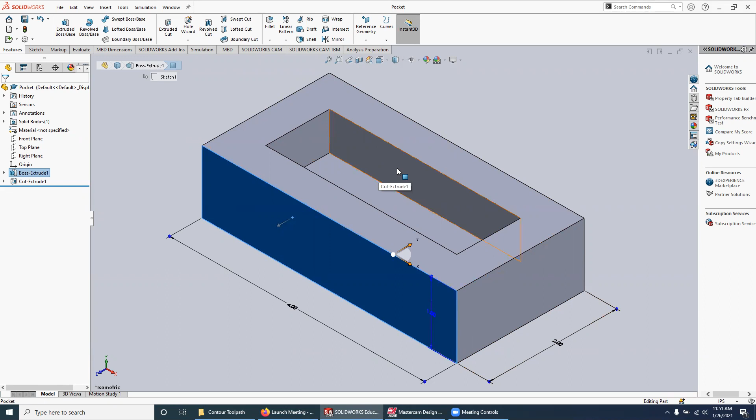So I'm going to stick with our very simple parts here, using our stock material that is 4 inches across, 2 inches in this direction, and 1 inch thick, and just add a pocket to it, a very simple pocket that we'll do in Mastercam, where this pocket is 3 inch dimension in this direction, 1 inch dimension in this direction, and is 0.6 inches deep. So again, just a very simple part to get the mechanics down of actually doing pockets in Mastercam.

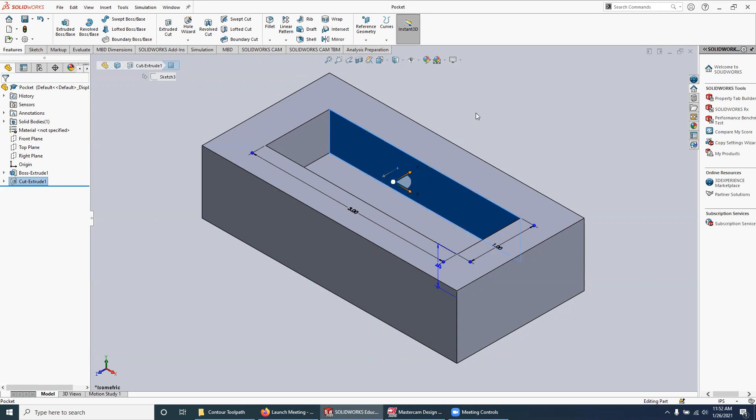And you'll also notice, if you happen to be watching this and you're not one of my current or former students who are looking at this for current instruction for class or as a refresher, that I've got some sharp corners in here. And what I'll do is talk about that at the end of this video, but also do additional videos where we make some changes and talk about the radiuses that are left behind by tooling. So just want to call your attention to that again in case you're watching this and you don't happen to be one of my current or former students.

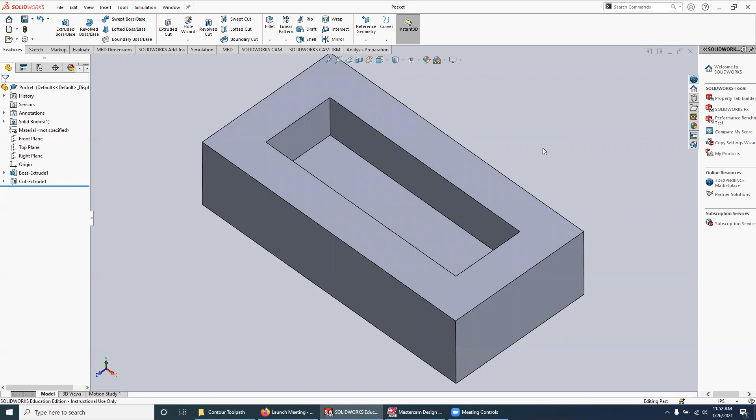So let me go over to Mastercam here. And so what I'm going to do is instead of taking the SolidWorks model that I have and bringing that into Mastercam, I'm just going to go ahead and redraw this as just a two-dimensional drawing in Mastercam, and then go ahead and do the tool paths from it.

So once again, with trying to do something that's fairly simple here, I still want to be able to show how to draw things in Mastercam, even though if you get into more complex parts, particularly for my students, it may not be the thing that they would want to do. They may want to use SolidWorks, but I'll address bringing in a SolidWorks part and working with that in an upcoming video. So at any rate, I'm going to go ahead and first draw the rectangle that defines the outside of my stock part.

So it's really with what I'm doing in class here. The other thing that I've mentioned to my students is that for the purposes of this class and what we're machining with these small plastic blocks, we are making our stock piece and our finished part the same exact dimensions. Although that's not necessarily how it would always happen in industry, or even for them when they get to their senior projects, for these introductory videos that's sort of what I'm sticking to. And once again, there will be another video coming up where I will give some strategies for using stock material that's bigger than the finished part.

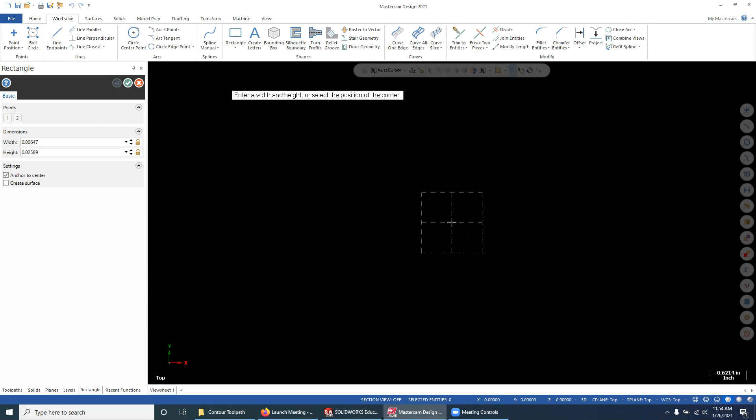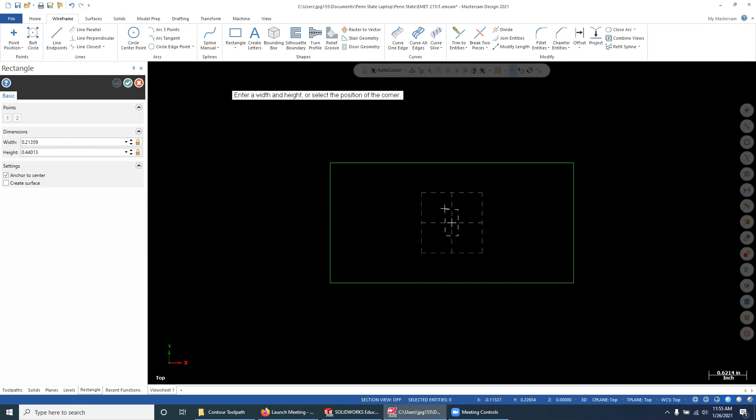So I'm going to go ahead and anchor this to the center for this rectangle. And when it tells me to select a base point, I'm going to select the origin here. So I'm going to make this outside rectangle be my 4-inch by 2-inch rectangle. Instead of completely getting out of this particular command, I'm going to make use of this OK and create new operation over here in the rectangle dialog box, and make myself a new rectangle inside that will represent the pocket. So this happens to be 3 inches wide and 1 inch in height. And I'll just go ahead and select OK.

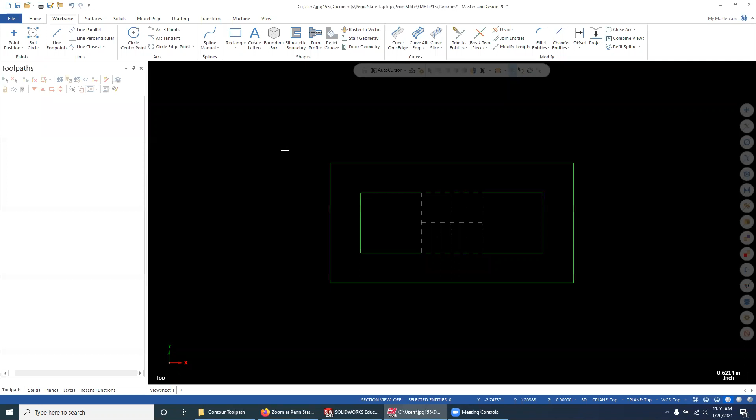And so now I have the geometry that I've created, which is the representation of the outside of the pocket, or essentially what we use as the contour for the pocket, as well as the outside of the part here. So at this point, even though the geometry is quite simple, I'm going to go ahead and save this part. So I'm going to do a file, save as, and go right to where it is that I'm saving. And in this case, I'm just going to save this as pocket 1 and hit save.

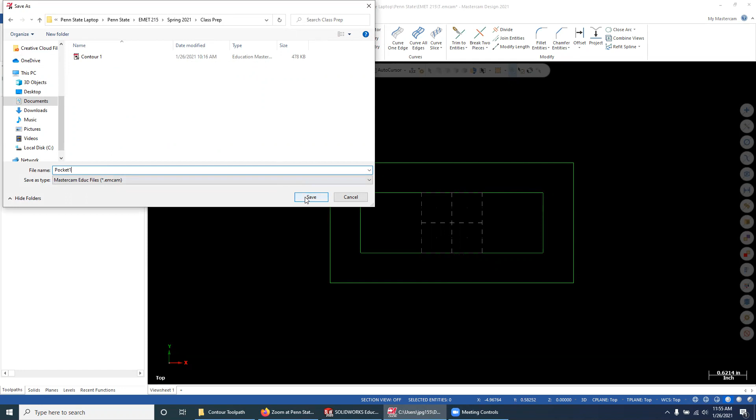So another thing that I want to mention about these videos is in the first sets of videos, especially with the contour, I made these in a lot shorter sessions, but that was so that I could break it apart into more discrete tasks within Mastercam. At this point, though, I'll go through a lot of the same tasks in terms of doing the machine setup, the stock setup, but I'll try to stick to doing it all in one video for the most part, and maybe break it out a little bit if I think it's getting to be a little bit too long. But that's sort of my intention right now.

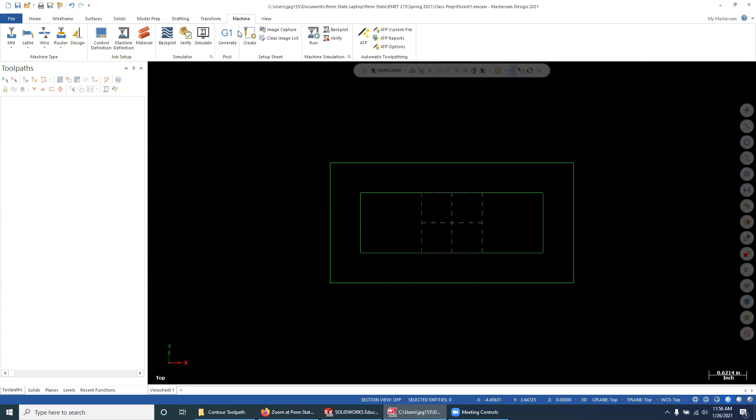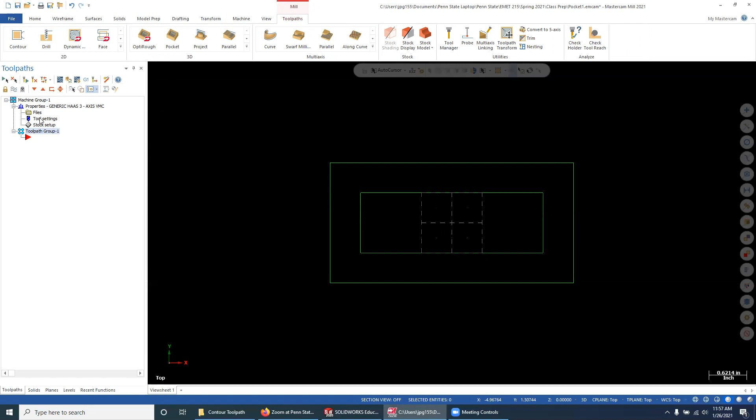So the next thing that I want to do now is I want to come in and add my machine group. So I'm going to choose my machine. From this machine tab, I'm going to come all the way over here to the left, and the mill that I'm going to choose is this one that I had already added in previous videos, which is this generic Haas 3X mill. I'm going to select it, and you'll see that over here in my toolpath manager, of course, the machine group pops up. I'm going to also open up the properties here for this generic Haas 3X 3-axis VMC, and I'm going to make some changes to my tool settings and my stock setup that are going to be very familiar to you from the previous videos that I had done with the contour.

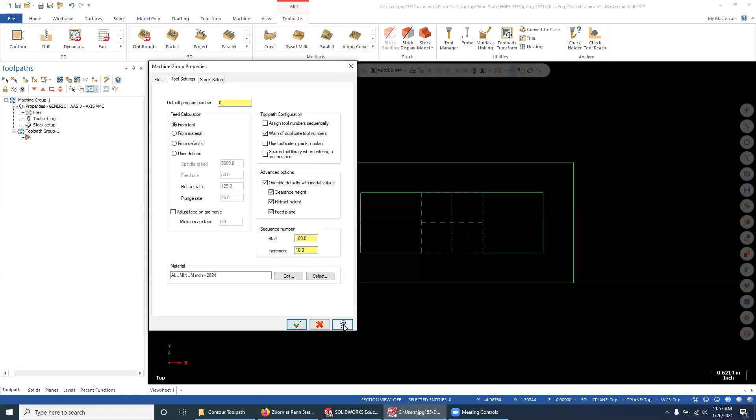So in this case, I'm going to warn of duplicate tool numbers, and I'm going to override these defaults with modal values, and just go ahead and enable each of these. Once again, as I had mentioned in one of the last videos, if you ever have a question about what these settings are doing, you can always open up the in context help. It will launch in a separate web browser, and then you can usually select on parameters. And when the parameters opens up, you can see an explanation of what these different settings are.

So in my stock setup, I'm also going to enable this display, and I want to have the wireframe display because that happens to be what I prefer. I'm also going to go ahead and put my dimensions in. There's an easy way to do this. What I'm going to do here is select all entities, and you can see I then wind up with my 2 inches in my Y direction and my 4 inches in my X direction. And my stock part, again, is the representation of the chunk of material that I'm going to be cutting. So what I'm going to enter in here is my 1 inch.

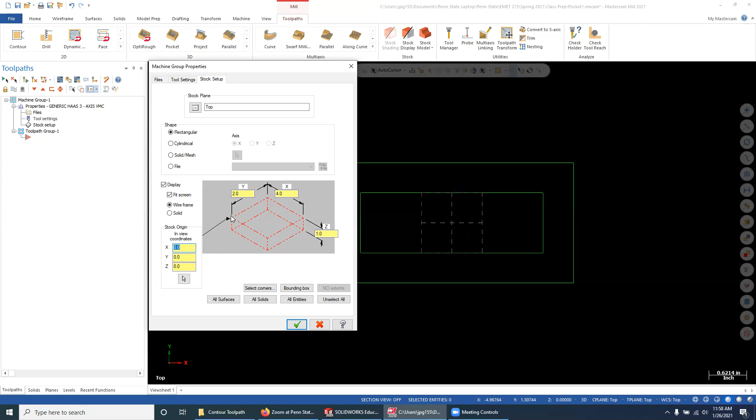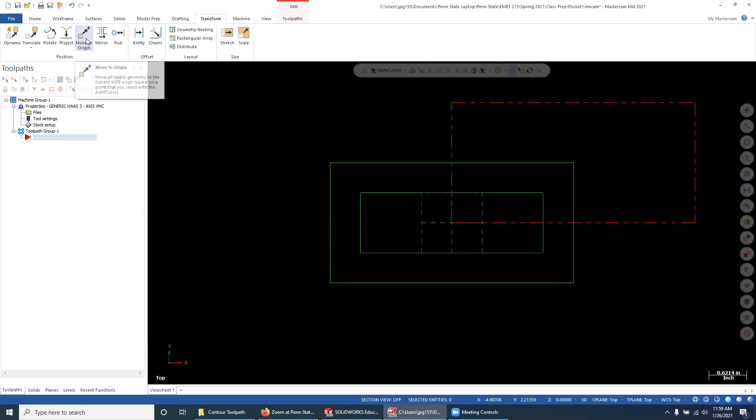The last thing that I'm going to do in here is simply left click over here in this corner so that I can move where my stock origin is at. And once I'm back out onto the screen here, I will also move the origin for my geometry as well. So let me just go ahead and select OK and do that. Because right now my origin for my geometry is in the center here, these two don't match up the way that I would like them to. So I'm going to go into the transform tab, and I'm going to use this move to origin. It tells me to select the point to translate from. So I'm going to select this lower left-hand corner, and it just moves everything over.

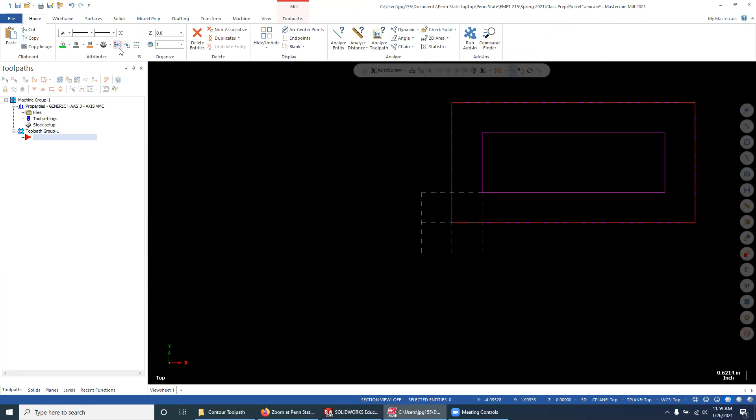Just to review, if you want to clear these colors back to the original geometry colors, you can go to the Home tab, and in this Attributes group, there is this button called Clear Colors, and it will bring everything back. If you want to view things on the screen a little bit better and get everything to fit in the window, in the View tab, I can go over here to where it says Fit, and it will zoom and fit to the entire window. If you don't really care for that, you can always use your mouse wheel to zoom in and out. And you can also hold down the Shift key and the center mouse wheel, and you can sort of pan around.

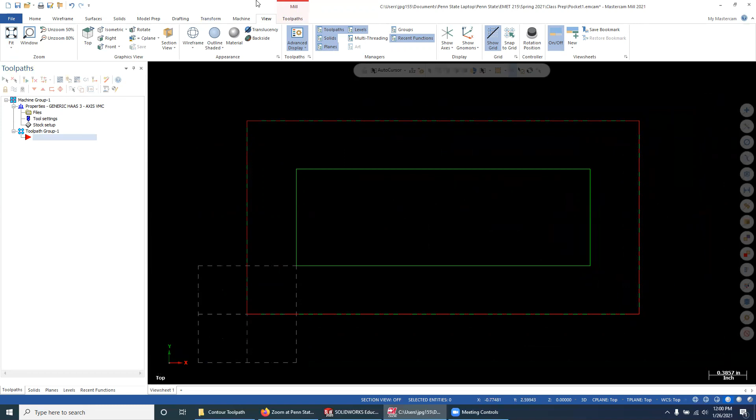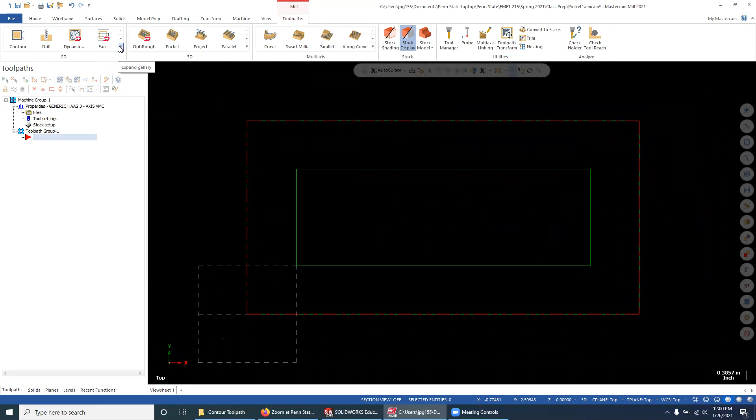So now that I have my machine group in here, I'm actually going to go in and add my toolpath. I'm going to add in my pocket toolpath. Just to again review here, I'm not using these 3D toolpaths. I'm still using these 2D toolpaths over here. In order to find that pocket, I need to expand this gallery simply by left clicking on these arrows here. That opens things up, and I can see that I've got a 2D pocket that I can choose. So I'm going to go ahead and do that. The first thing that opens up here is my chaining dialog box. In the contour videos, what I ended up using was this single chaining method.

What I'm going to use here, though, is this default chaining method, because what I want to do is select this entire area to chain, so this entire inside area. So if I simply left click on this now, you'll see the entire rectangle is highlighted. You'll also see that this is the direction that the tooling will take around this as well. But what we're going to end up doing is setting up a zigzag toolpath.

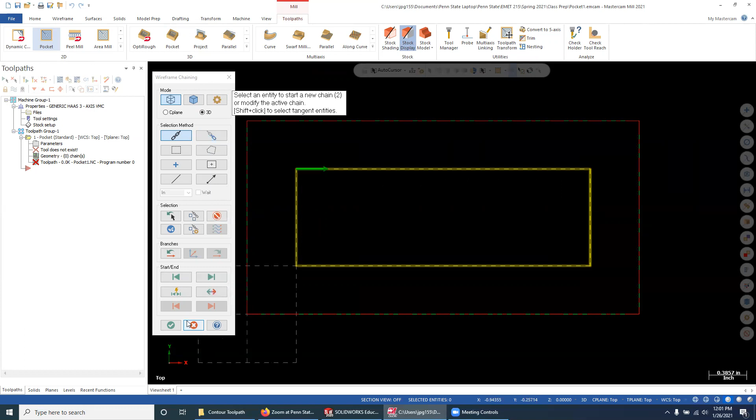So at any rate, let me go ahead and select OK here. And it launches me into this 2D toolpaths for pocket dialog box. So very similar looking to the contour that we did. And so the first thing that we're going to do here is select our tool. We're going to select the same tool, that 1/2 inch flat end mill.

So a lot of this is also going to be very similar to what we did in terms of going through the filter, selecting the library tool, and then changing our feeds and speeds. Let me go ahead and just review how to use this filter. Right now, the only tool that I have selected is this flat end mill. If you happen to open this up and all of these tools are selected, you can left click on none and it will take all of these away.

And what you can then do is just go back and select the thing that you want, which in this case for me is this flat end mill. And I want to find the Mastercam library tool that is equal to a 1/2 inch in tool diameter. So I'm set here. And by the way, this has a drop down here. In this drop down, I've just set this to equal, and then manually entered in my 0.5 inches. I'm not going to change any of these other settings right now. I'm just going to go ahead and select OK.

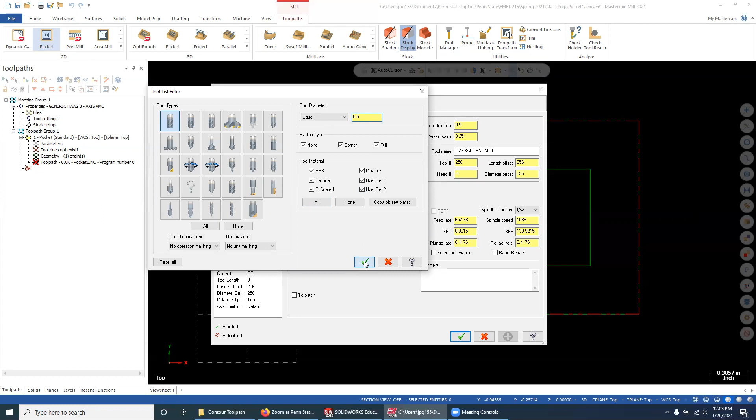But you'll see that, again, by using this filter, it does not change any of the tool name or anything here. I actually have to go into this tool library and select my 1/2 inch flat end mill. So I'm going to go ahead and select it. And you're going to see also that now I have this tool number in here for the tool number, the length offset, and the diameter offset.

Because I don't have this same tool number loaded on the milling machine that's in our lab, I'm going to change this to the number that I do, which is tool number 6. So that's the tool number associated with that tool. That's the position that it's always in on the mill. If you'll notice, that also changes the length offset and the diameter offset.

And we want that to happen because all of these settings in here will eventually trigger different G codes to be set whenever we go to post-process. And we really need the tool number, length offset, and diameter offset all to agree, so that when we run this on the machine, we don't have any bad things happening. And I'll talk about length offset and diameter offset in class a little bit more.

So the other thing that I want to do here is change this feed rate. We're going to use the same feed rate that we used before for the contour, which is 20 inches per minute. And we're going to use a spindle speed of 2,500 RPM, so revolutions per minute. So again, the feed rate is in inches per minute. The spindle speed is in RPM.

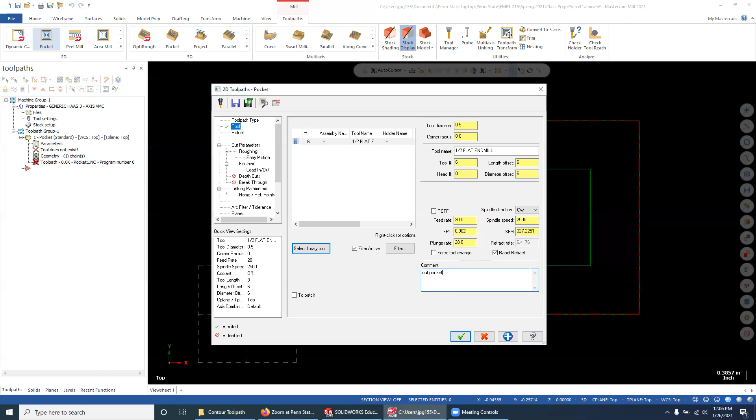I'm going to also add a comment in here, just a simple comment that this cuts a pocket. And again, these comments will also be output into the G code as well. I'm going to go down here to my cut parameters, and in this, I'm going to leave the machining direction at climb, and we'll discuss climb versus conventional milling in class as well.

The other thing that I'm going to do down here is I'm going to set the stock to leave on walls and the stock to leave on floors at 0. So in other words, I'm going to take everything off in this pocket. So if you desire to leave stock on the walls or the floors for additional finishing passes or something like that, this is a way to do that. But for the purposes of this class, we're going to go ahead and take this all the way down to 0, which means we're not going to leave any of the material on in terms of the depth or along the side walls of the pocket.

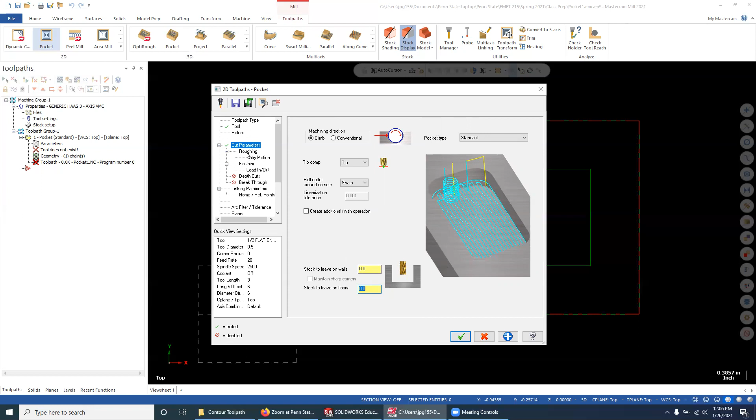So I'm going to step down to roughing now. In this one, the only thing I'm going to change is I'm going to change to a zigzag cutting method. So what this is going to do is drive the cutter back and forth. So instead of using a high speed or some of the other cutting techniques here, I'm going to use a simple zigzag, and I'm going to leave all of these other things, including the step over percentage and distance, set to their current defaults.

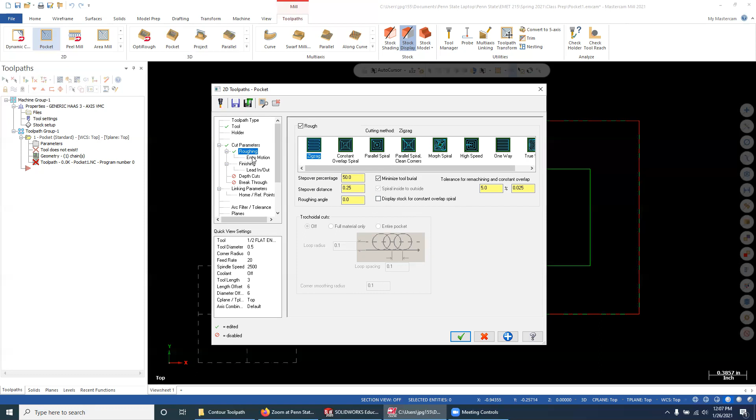For the entry motion, when I move down to the entry motion, what I want to do here is make sure that my helix entry motion is enabled. You can turn this off and just plunge right into the material, or you can use a ramp where it just kind of ramps into the material. But I do like the helix.

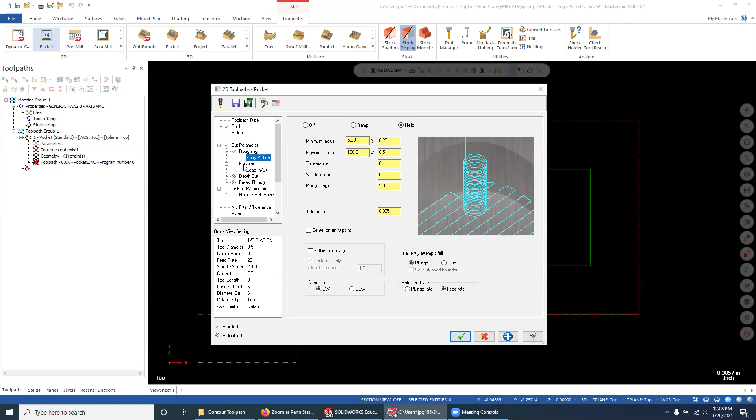The helix is nice for plunging into the material in the middle, sort of to start the cutting in the pocket, because what it really does is it takes advantage of the end mill's side cutting capability. The end mills are really designed for side cutting, not for just plunging into material. Now in our labs, we use predominantly center cutting end mills, and so they can plunge directly into the material, but this does make for a more efficient cut, which is why I like to use it. And I'll go ahead and just keep all of the rest of these defaults set the way they are for now.

So for our finishing cuts, I'm just going to do one finishing pass here. And what I like to do in here is enable keeping the tool down. And I also like to make sure that machine finish passes only at final depth and machine finish passes after roughing all pockets are enabled, specifically for this class.

So these are a couple of things that will actually end up cutting down on the amount of time that we spend machining. Although you're going to see that, for this particular part, the actual machining time does not take that long. In fact, for most of the parts that we do in class, the machining time is not what takes up the most time. It's actually the setup of the machine in terms of homing the part and things like that, especially when you're new at trying to find all the buttons and stuff like that.

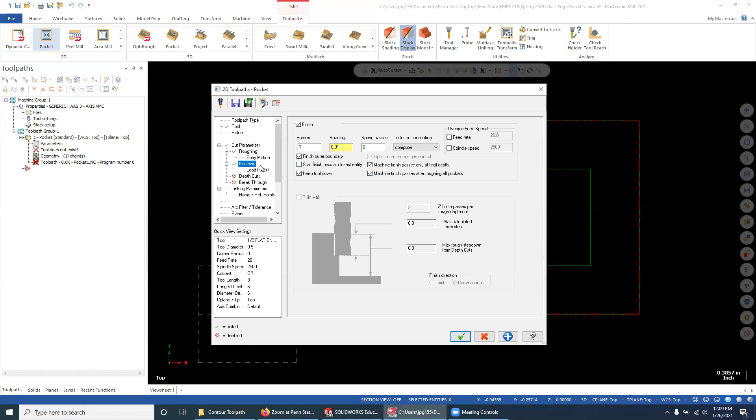So the next item down on the list here is the lead in, lead out. For the lead in, lead out, I'm actually going to disable that for this pocket. I don't really need this. I'm going to be just going over to the part and plunging in using that helix entry method. And so I really don't have a need for the lead in, lead out, because I don't have any sort of complex setup where I need to avoid clamps or anything like that.

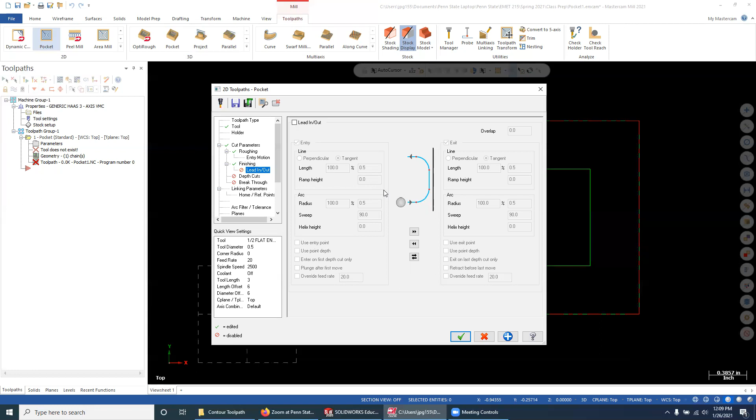I am going to enable the depth cuts. For the depth cuts here, I'm going to enable a max rough step of 0.2. This is pretty similar to what we did with the contour. You're going to see that when we simulate the pocket, it's going to divide this into 3 equal parts. And the reason is that we're going to be setting a final milling depth of 0.6 here down at the linking parameters.

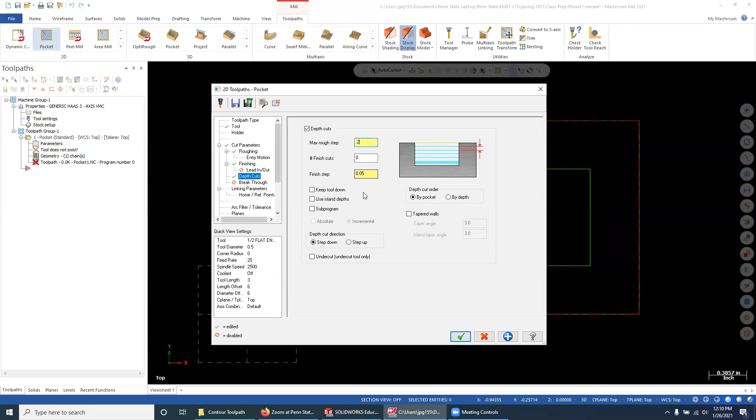So I'm not going to change anything else in here. I'm not going to be adding any finish cuts or anything. Let me just skip over the breakthrough. We're not breaking through this material. So remember, the stock material is 1 inch thick.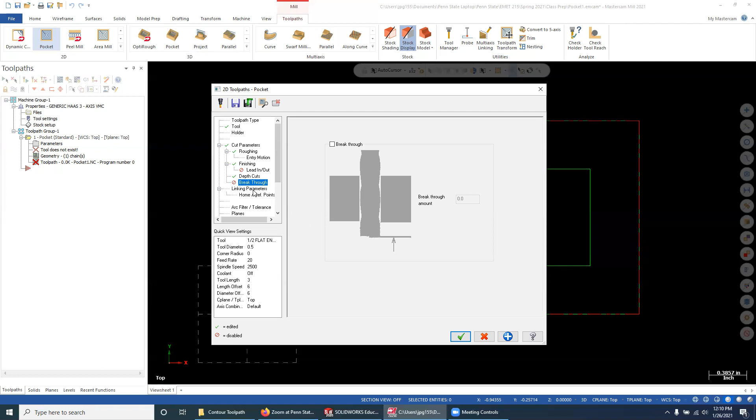So in this case, what we're actually doing is we're just going to be milling down to a final milling depth of 0.6 inches. So we don't need to enable this breakthrough. So I'm going to go ahead, jump to my linking parameters, and go ahead and set all the typical things that I set in here.

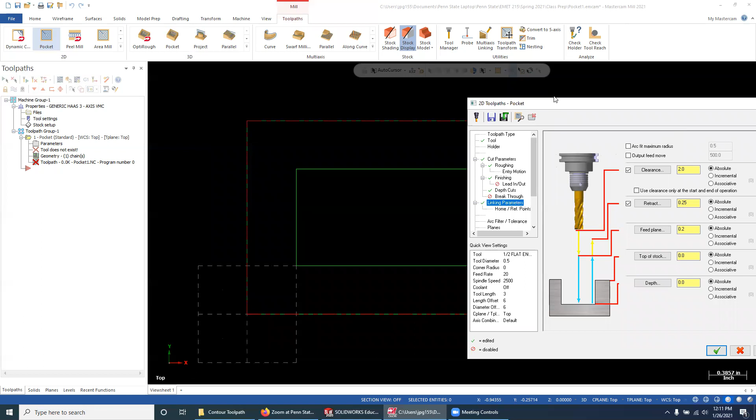So I like to set this clearance, and I also like to make sure that all of these are set to absolute. So again, we're using absolute versus incremental moves in the class, such that all of the moves that are made by the machine, once we generate the G code and put it on the machine, will be based on moving from our origin, not from a previous tooling position. So that's what we're looking to do.

The final thing that I want to set in here is the depth, and I'm going to make this a negative 0.6. And just as a reminder, the reason that I set this as a negative number here is because this is the top of my stock and my depth is below that. So right now, in the Z direction, this is my 0. Anything below it, in order to machine this pocket, is going to be at a negative depth. So let me go ahead and select OK to this.

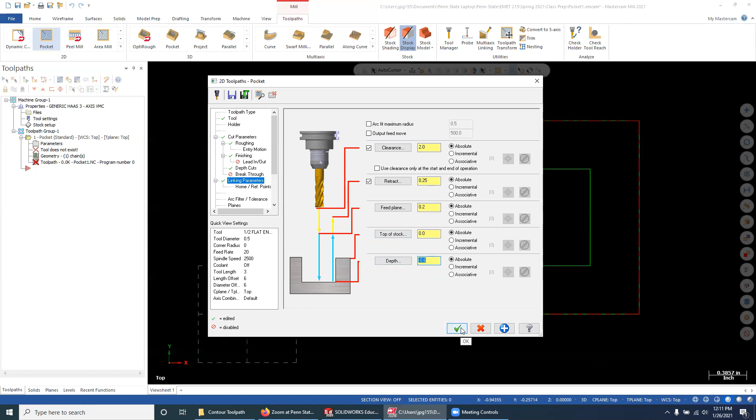And you're going to see now, as I go out to the screen and I hit my view button and go to my isometric view, you'll see the toolpath. Okay, so now you'll see that it's going to be plunging in here. And we're also going to see that this is indeed using the depth cuts here. So you can see that this is divided into three different steps.

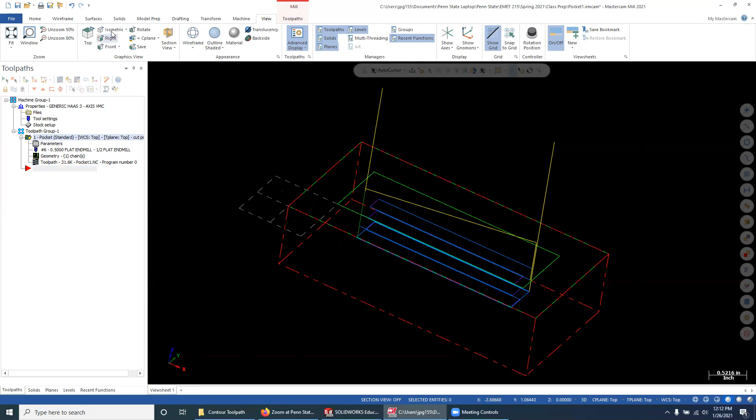The one thing that you'll notice here, though, is that because this is such a small pocket, we actually don't have room for the cutter to go in a helix motion. So that's why you're not seeing that replicated in these tool paths right now. So basically what's going to happen is this is going to plunge in here and zigzag back and forth.

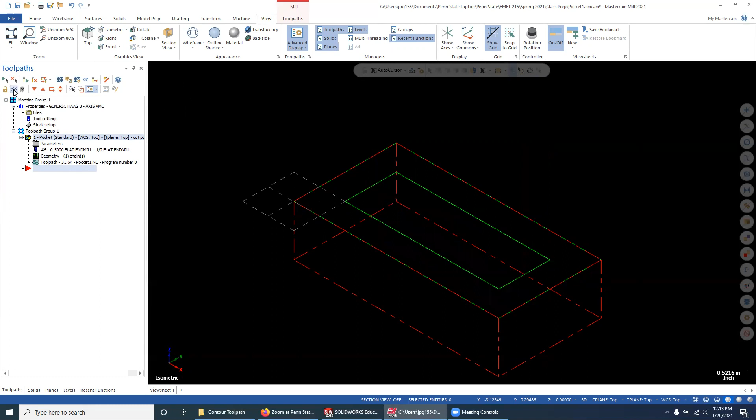Another reminder here is that as you add more tool paths, which we'll be doing in upcoming videos, if you want to make sure that these tool paths do not display on here, there's actually this toggle that you can use. So over here in the toolpath manager, right between the lock and the little ghost looking icon, there is this toggle display icon, little wavy lines, to show those and to hide those as well. So what I want to do now is let's just go ahead and run the simulation, and we'll see what's going on here.

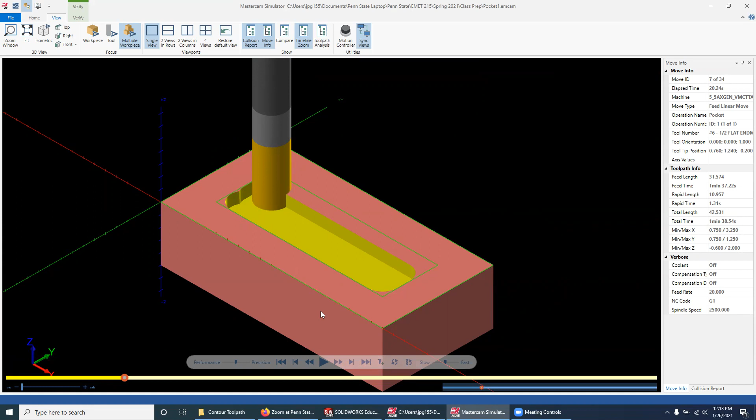So I'm going to run this, just step this all the way through. And again, because this is such a short distance here, we're not actually getting to take advantage of that helix entry motion. So it just plunges into the material. And that's okay, because again, what we do in the labs is we end up using those center cutting end mills, and so plunging into the material is not that big of a deal.

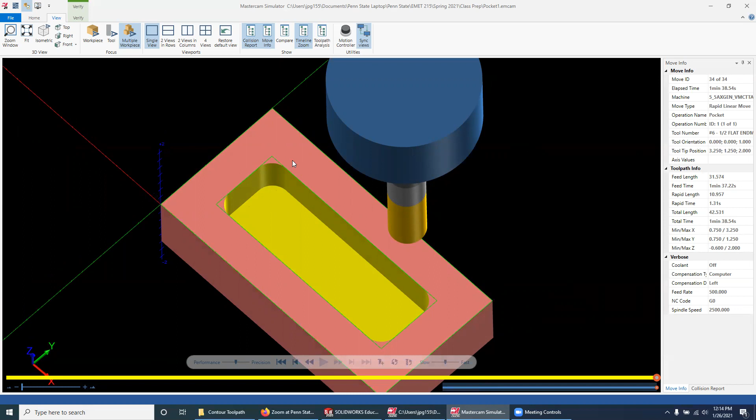So instead of stepping through this, I'm just going to finish this off. And the reason that I want to do this is just to point out something that I'm going to address in an upcoming video, and that's the idea of these corners. So you can see my geometry that I drew here kept these very sharp corners, but that's not something that is typical for machining anyway. Very, very rarely do we want very sharp corners unless there's some functional design reason to do so.

But no matter what you specify here in terms of corners, you have to realize that whenever you're machining, you're always going to be at the mercy of the radius of the smallest cutter that you use. Right now, this is the smallest radius that we can get into this corner with, because we're using a 1/2 inch flat end mill. So the only way to really address this is if we use smaller cutters, or if we use something like pocket remachining with a smaller cutter.

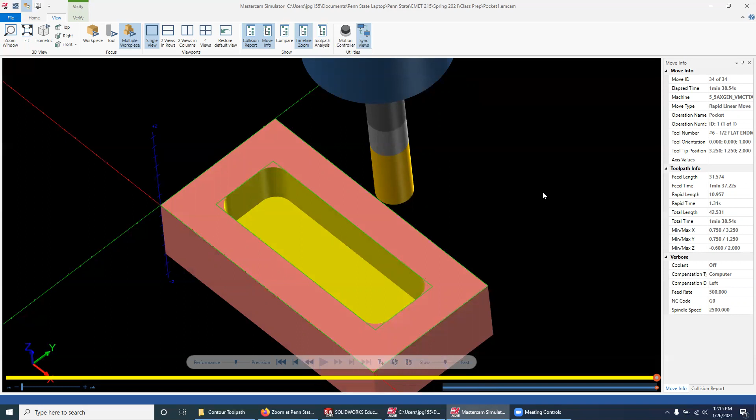So in upcoming videos, I will address that and talk to you about some strategies for making these corners better. But from a design perspective, again, there would not be too many reasons to leave those sharp corners unless in your mechanical design there's some reason to have those from a functional standpoint.